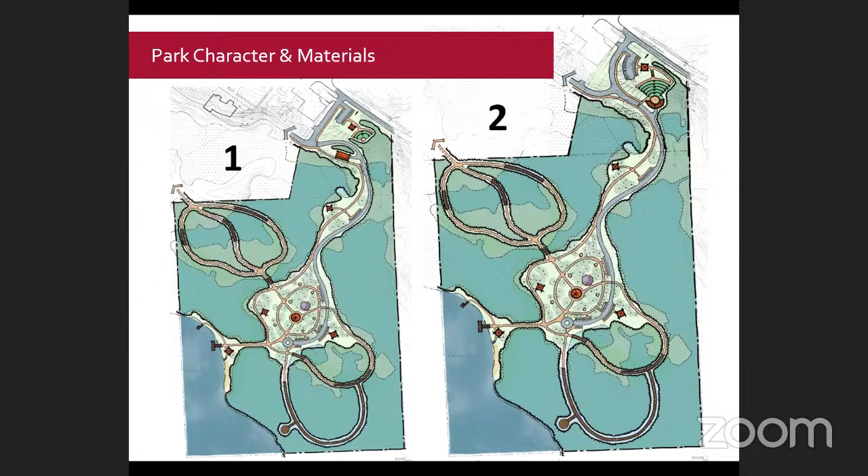This is a slide excerpt from our last presentation at the last meeting. As you might recall, we had a couple different options that were pretty similar, except for the north end of the park, which was related mainly to the amphitheater size and capacity.

Overall, everybody seemed pretty content with the conceptual design as presented. Everybody agreed with keeping the character of furnishings and structures consistent with Bloomer Park, and maintaining a little bit of identity across the township park system.

The majority of the committee members favored a larger capacity amphitheater, but at the same time, I think we all recognize that's going to be a much later phase in the park development. There's a lot still to be discussed and figured out in terms of the amphitheater, so what we're showing at this point is more or less a placeholder.

There was some mixed opinions on the use of porous pavements, or which type of porous pavement. So when we get into the cost estimating discussion later, we've used some cost figures that would accommodate a variety of different options, just so we have some dollars allocated for that.

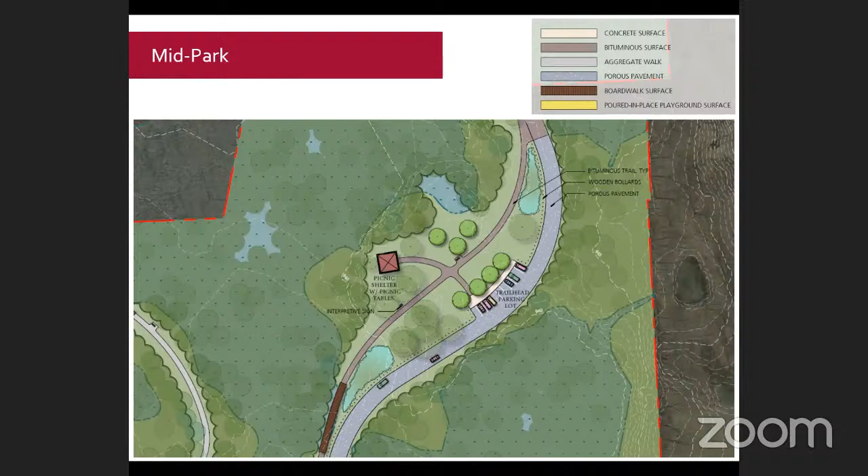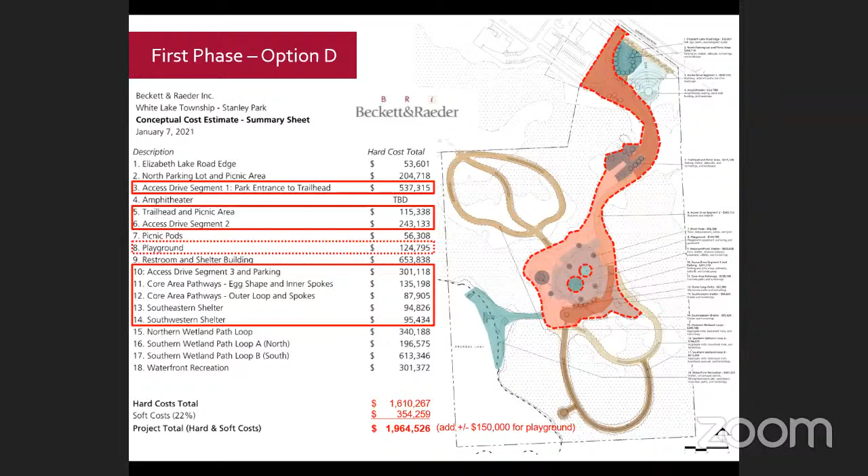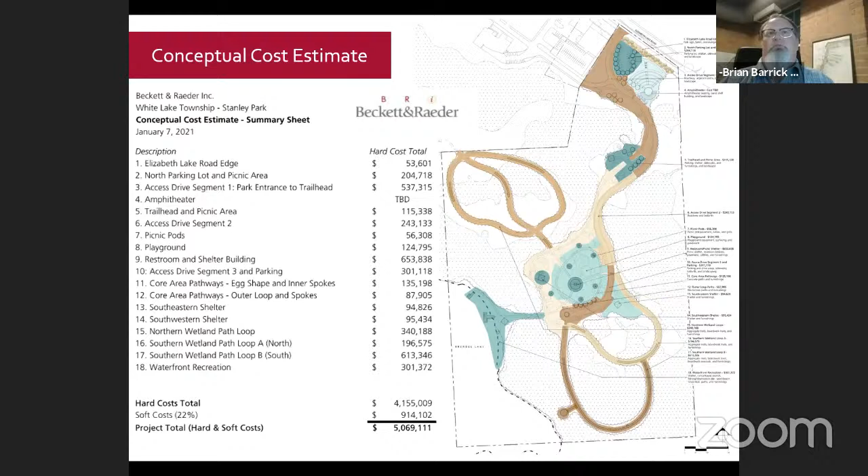So I'll pause here for a moment and flip back to this diagram. I'd just like to gather everybody's thoughts on priorities for our first phase, and if you have any reactions to the menu of options or these four concepts that we've initially roughed together.

And Justin, maybe you want to give a brief introduction to budget thoughts. Sure. So where we're at now - the accounting department is still finalizing the December report, but as of now, the parks fund balance is approximately $215,000.

With the millage collection for this year, that's estimated to be about $356,000. So that would put the parks fund at $570,000.

So we have an annual maintenance cost of, I'll say 50,000 to be safe. And in 2020 it was like 42,000. And that's just grounds maintenance. Then we have some insurance costs and electric, some utilities if we turn on the lights at the pavilions.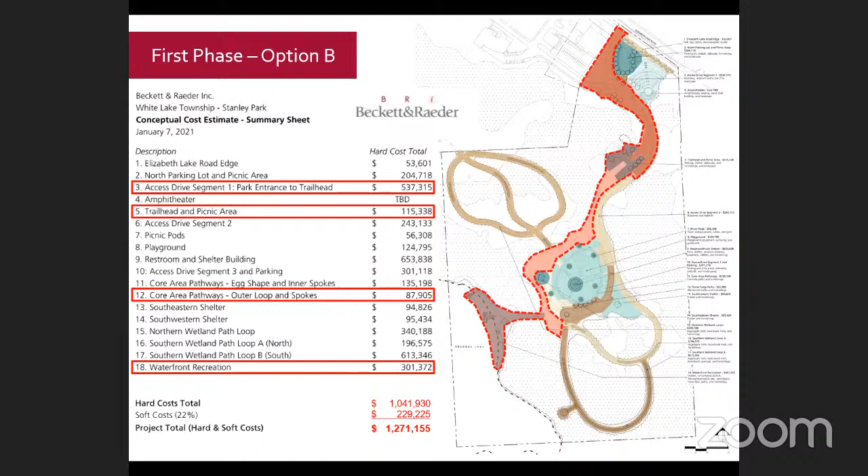I want to give our parents and grandparents peace of mind that their children are safe being on the playground. Secondly, there's water in this park, so we need to be conscientious of that. Even in the wetlands, there's water deep enough that children could potentially fall into. So what I have in mind is a fence similar to our neighboring community of Hess Hathaway Park, a wrought iron fence that shuts with a gate. It's really a popular destination for families because their children are safe and stay in one area. So I'd like to request a fence around the playground area.

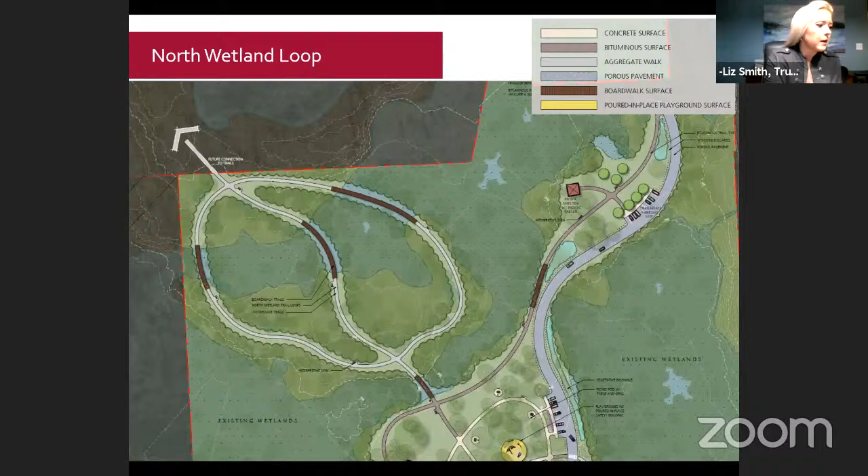Secondly, the parking circle, the cul-de-sac area needs to come much closer, as close as we possibly can, to the waterfront. It's still quite a distance, and there is room. If we go to the slide, Brian, help me out here, but I think there's probably 50 to 100 feet that we can push that closer to the drop-off area, closer to the stretch between that area and the first picnic shelter.

So that needs to come as close as we possibly can. Ideally, I'd like to see some handicap parking spots at that picnic shelter near the water. I know that there is a structural issue crossing the wetlands there, so that might not be possible. But we do need to service properly our handicap residents, physically disabled, and of course, senior citizens. That is quite a distance.

Even if you move it closer, it's quite a distance to drop off and then park back and walk. Potentially you have senior citizens in their 70s or 80s. They have to drop off a spouse, come back, and walk again. So I want to get that as close as we possibly can. I also would like to explore the option of a pull-off or a drop-off if possible to cross those wetlands. I know structurally it might not be possible, but please put your thinking cap on that if it is possible. But at the very bare minimum, that needs to be moved closer.

I know in the beginning slides, you didn't recommend a dog park and pickleball and things like that. Again, a dog park—I shoulder the responsibility of representing all, 30, pushing 33,000 residents of White Lake Township. A dog park is high on the list. So I need to do my job as a trustee and bring that forth again. I did ask for you to plug that in, and unfortunately it's not plugged in. So I do want to see that in this map somewhere. I do believe we might not be able to do a large scale dog park, but I do believe we might be able to fit it in.

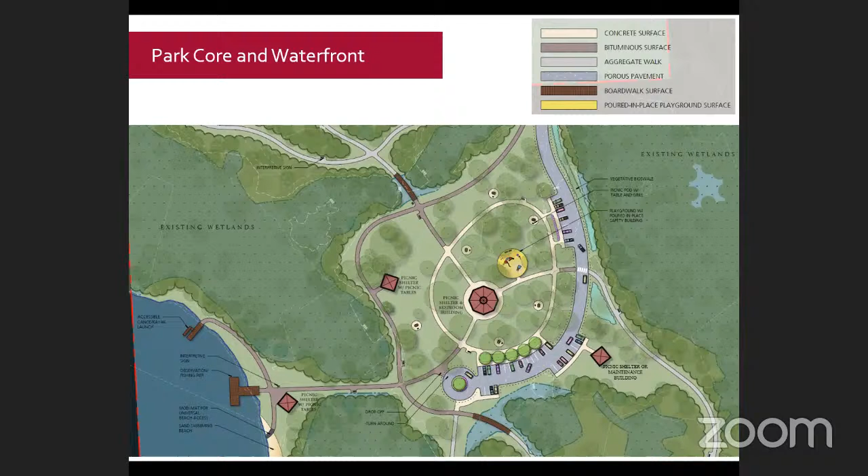Also, as I mentioned, trustees, we shoulder the burden of a different look when we approach township projects. So that road coming in initially does need to move as close as possible to the Civic Center property line for several reasons. One, it gives us some space there to tuck in some other amenities, and two, it's a safety issue for our police and fire. It can become an alternate drive, and it also allows them to keep an extra eye on the entrance and comings and goings of the park.

By moving that road, I think we can fit in a basketball court or a multi-use court. I am not in favor of a passive park here. I'm in favor, like I mentioned, of a unique recreation park. So I see wonderful, beautiful pathways and lots of pavilions, probably too many park shelters and pavilions at this stage. We can always add more later. And I don't see enough to do. I want to represent the growing family in White Lake, all ages and stages, and make this a multi-generational park. So we absolutely need to provide more to do here.

A basketball court, bare minimum, can be used for so many different activities. All ages like to play basketball, chalk, roller skating, kicking a ball, just fun play for any ages. So I don't see enough to actually do at this park. We are really blessed with passive parks in our community. We have Highland Rec State, we have Pontiac Lake, we have Bloomer Park.

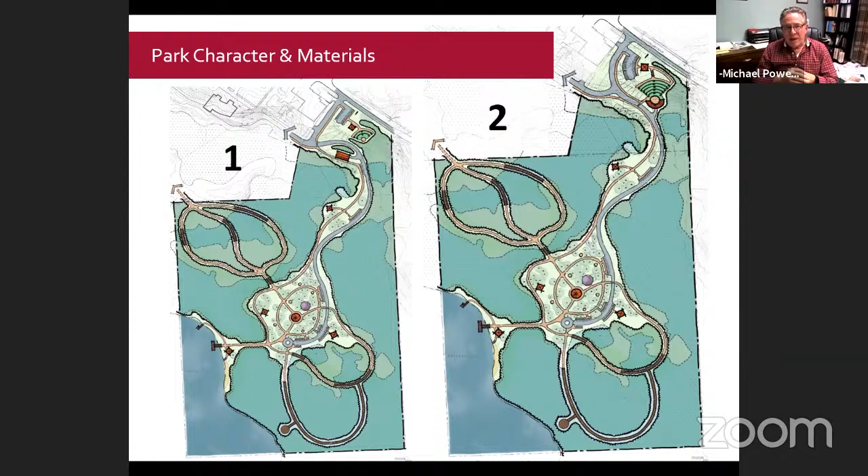I like the idea that Liz presented, and I also presented it to the Lakewood Village Association, that possibly we can have a laser detector to monitor the cars going back and forth from Elizabeth Lake Road, so the police department can hear something, look out, and see the car passing their windows there, and keep track. Is somebody taking a motorized boat down there? Do we have a caravan of motorcyclists going by, or a rack of canoes being dropped off down there? It's something to where there's some accountability, and I'll get into that later as well.

I agree with Liz that a basketball court, even if it's smaller in size, people just love shooting baskets in a pickup game. This is going to be the only activity they're going to have when they live downtown here, and it'd be really nice to have something. I think if that road's pulled over, it doesn't have to be attached to the parking lot. It can have steps going down, tiered down, so that it's an amenity we can offer the downtown area people.

I'm going to suggest, and I'm sorry I missed it, I just picked up Marie saying she really likes the size and the larger type size of the amphitheater. I'm going to suggest that right up front, and even our staff could do it, or volunteer work, because of the slope of the ground there. You could put in a brick paver circle down at the lower level, clear some trees and brush, keep that clean, and have an amphitheater for much smaller events. Certainly nothing you'd advertise on YouTube or Twitter, but you could have a pickup quartet, or singing at Christmas time, right there. Very inexpensive, and then you could grow into the bigger amphitheater - it might be a really neat way to do something really inexpensive.

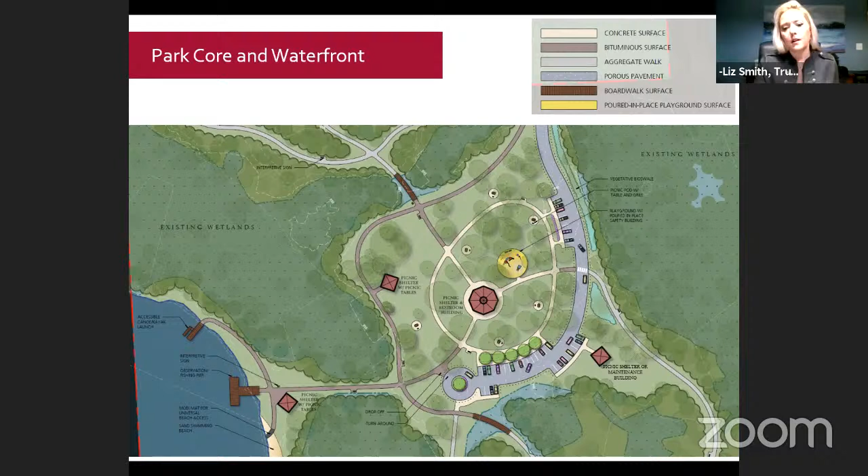And then we could still have a half court basketball here, towards the top entrance. Basketball is just my beginning point. I imagine, I hope we have a natural slope here - we could make a great little sledding spot for the kids in the winter.

I really want to stretch you and push you to think outside the box of what kind of recreation we can provide our community here, because the possibilities are endless and some of them aren't expensive. Basketball - we want to make this, our four-season playground, our most active and used park.

So I want to stretch your thinking, everybody on the board, and I want to thank you for your input and suggestions in getting us to this point. And thank you, Brian, for doing an amazing job incorporating all of our suggestions. But...

There's many things we can do to create some recreation. A sign for an exercise spot isn't a costly recreation, where we can have along the pathways some exercise stops. That's not a huge cost. So just with some creative thinking, we can incorporate more recreation into this park.

I think we're also at an advantage having Mr. Powell as an advisor to the park committee, because he's got so much knowledge and design experience in engineering that he really helps the township by giving us a different view, in addition to our consultants. So I think we're in a good place.

And another thing we need to think about is all age groups. The park needs to be multi-generational. For me, I represent the growing active family in White Lake, and we need to be cognizant of their desires, and multi-generational - where the active grandparent, like Mr. Powell, wants to come and bring his grandchildren.

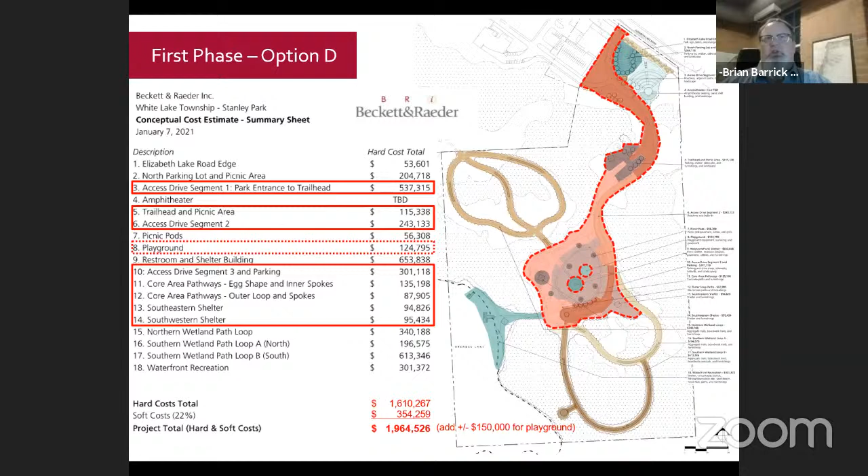It's scaled on the drawing as a 60-foot diameter octagon, so it's quite a large structure. It accommodates a good number of people for a community event or a large family reunion or whatever the case may be. The point is it's a large structure with a lot of capacity, and there's a cost associated with that.

So it could certainly be scaled back into a smaller structure with smaller dollars. We've also included in that number bringing power down into the lower end of the park so that the shelter and the restroom both have power available.

The restroom itself we have figured as an off-the-grid type facility that would utilize harvested rainwater and have very low flow, environmentally sensitive fixtures, where the wastewater would go to a vault system and then would occasionally be pumped according to use. So it's an eco-friendly system, appropriate for this lower end of the park where getting water and septic in these low-lying conditions would be difficult and costly.

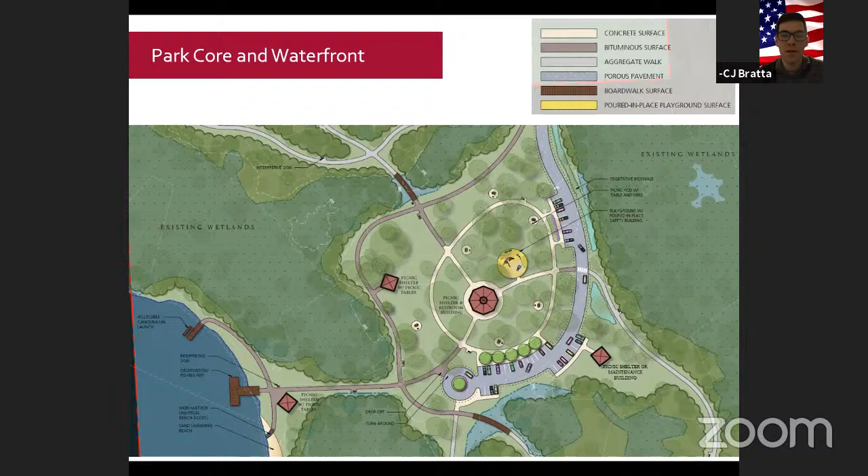I agree with what Liz was saying about what we need to get started. I think we can all agree that number one, the most important thing, is to get a trail from the road or a parking area to the lake. That's the most important thing we all need to agree on, to get this thing going. That's where I see it.

As far as saving cost on the bathroom, my opinion is maybe we can cut down the size of the main bathroom in the center of the park and utilize, as Andrea was saying, the plumbed, already ready building up at the front—instead of one giant bathroom at the end of the park, split it up and have two, one up top and one down at the bottom. In the meantime, until we can afford a large bathroom down there, maybe just utilize porta potties like we use at Holly Park to get us going with our current building, if we can retrofit that and get some bathrooms up there.

The most important thing is getting the trail going down to the lake, because that's what everyone is going to the park for. Everyone needs an accessible way to get down there, and then we can build on after that. I also like what Liz was saying about the fence around the playground—I think that's important to separate everything for everyone's safety, so I think that'd be good too.

That's a lot of information coming in. I just want to be realistic about how much we could put forward for match, providing like a 50% match that would go through a trust fund application and a duplicate land and water application. I'd say there's a 90% chance it would be funded, and if it's funded, it would be through land and water. There's more paperwork involved with a federal grant, but most of those applications are funded.

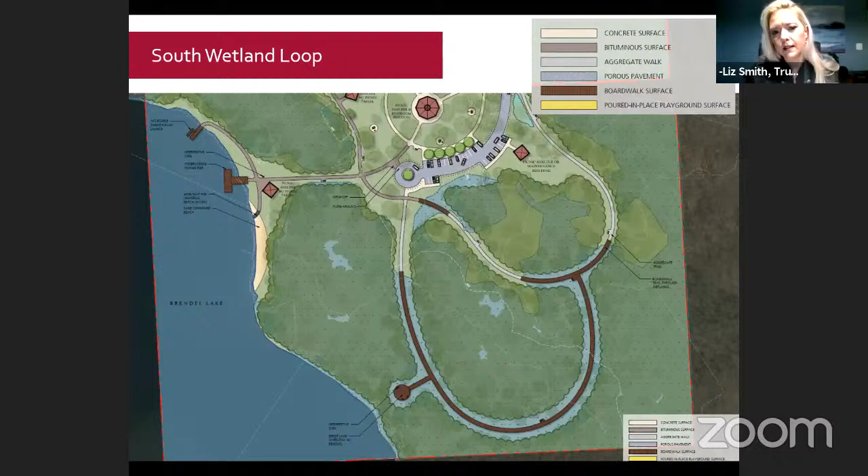Moving the road will be a priority for public safety. So adjusting this portion of the roadway is a priority, as we've been talking about. Keeping the building, there would be two options to do that.

One would be to bring a road along the south side of that building, along the edge of the wetland, which would have impacts and removal of the existing significant trees. The other option would be to swing the roadway further north around the building, which would basically result in a smaller placeholder for a future amphitheater with less capacity.

Okay, and I know I'm putting you on the spot, but just off the cuff here—if we forego that building and build a storage area somewhere else on the property, to not take away from the beauty of the park or future pavilion gazebos or picnic shelters, where would you recommend tucking a new storage building? If we're going to build a new one, personally I'd like it tucked out of the way. I think it'd just be more aesthetically pleasing to not have it in the beauty of the park.

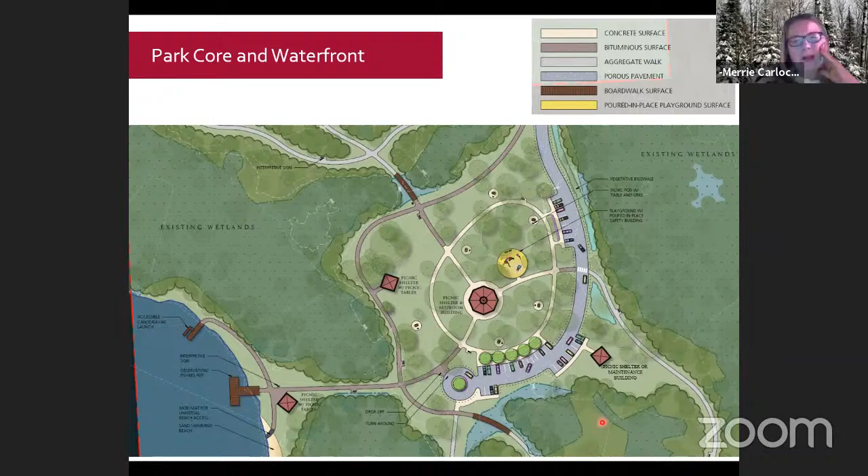We'd have to think a little bit more about that. Our initial thought was tucking it back in this area, which I know is not completely ideal. I think that's prime real estate, so I'd rather see it up by the trailhead—up in this area.

Let me just throw out another thought, though—two thoughts very quickly. Remember that you can't design this in a vacuum. The same equipment used to maintain the park will probably be used to maintain the Civic Center area, so you can't put it so far away from the Civic Center that it makes it inconvenient to do that.

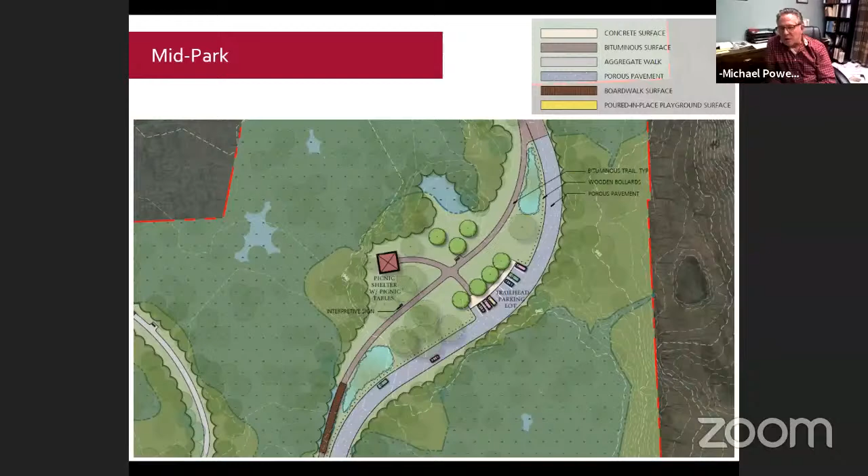Brian, a third alternative, which would be kind of cool—think outside the box a little bit—have the northbound lane go above the building and the southbound lane go around the west side of the building. Split the roadway so you don't take out as many trees with one roadway. Just as a thought.

I think most of us would like those trees to remain. They're beautiful. Yeah, I would feel very bad if the most significant trees were cut down. Totally concur, for a maintenance building.

So just for clarity of direction, is it the board's decision to keep the building or replace it? Can I summarize what I think the consensus has been over the last couple hours and then maybe some direction moving forward? It sounded like the consensus was, or at least the majority said, keep the existing building, try to incorporate some more active recreational amenities, moving the driveway, looking at some potential small fenced off areas for dogs, cutting back on costs, cutting back on the trails and boardwalks so it's not duplicative, exercise points. I think I have a pretty good list here.

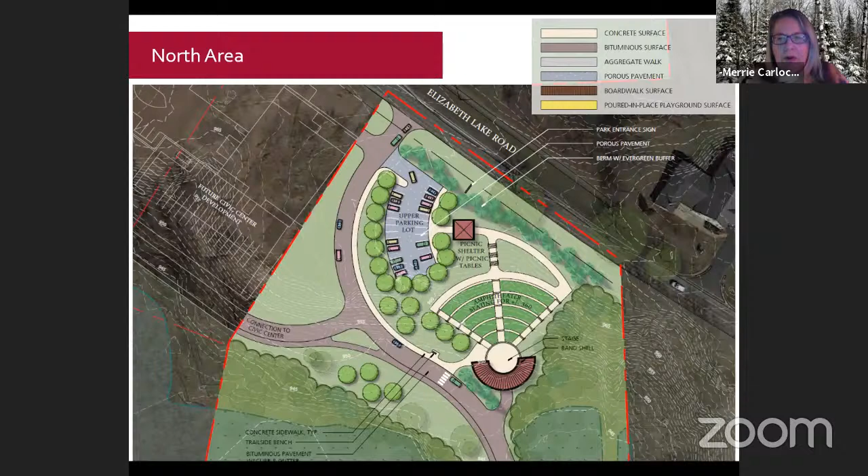Well, I just wanted to get a rough idea for Brian as far as how much he needs to plan for to try and get the ideas we really want done in phase 1 out there. Counting the engineering, you'd be north of $1 million again.

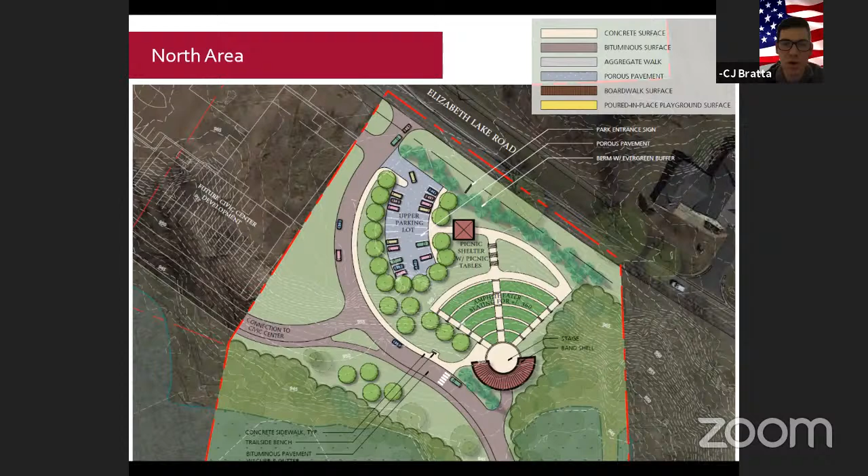Well, either way it's going to go north of $1 million, and the grant, like the trust fund grants this year, is only 300,000. I feel like it's going to go higher in '22, but right now the land and water grants are going to 500,000 because there's supposed to be more money coming to the state from the Park Service. So that's $200,000 more. I'm kind of leaning that way, even though there's more for us to put up front.

There's a lot. Well, yeah, you'd have to put up the $500,000. You'd have to put up $500,000 to get $500,000.

Getting the land and water grant, would we be able to qualify, do you think, based on your knowledge, if we had a trail mostly going to the water? Well, if we get mostly a trail going to the water, would that, I guess, technically qualify because we're getting to the water?

There's no natural resources points in the land and water fund. That's more of a recreation type grant, so it wouldn't matter whether you got exactly to the water or near to the water. But it still would score well. And as I say, most communities can't come up with that half match.

So maybe we need to go, because we're spending the most on phase 1, is what I'm getting at from everybody. We're going to be spending the most money on phase 1. So maybe we should try to get the most money to us in a grant as quick as possible to get this going. And then we can supplement down the road and go for a trust fund grant for smaller other ventures, like the actual kayak launch and the shelter, if we spent some money on other things that make it a usable place that a family can spend time and have a restroom, that kind of thing.

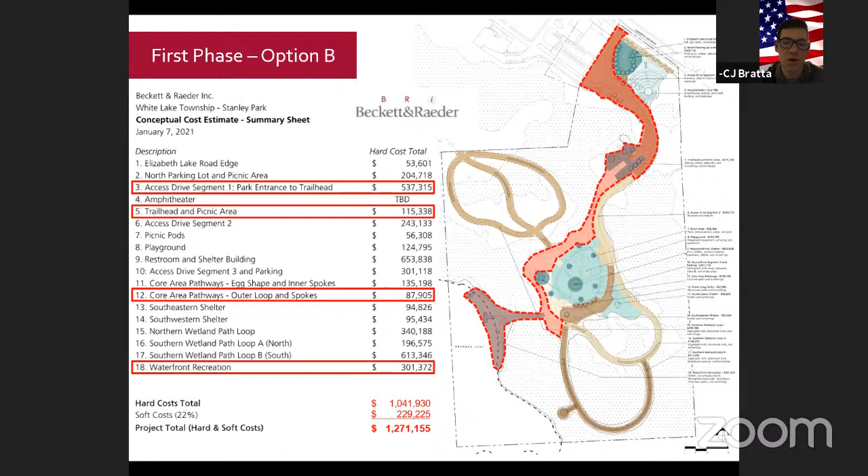Can I ask last question? I want to go back to what Rhonda said, because this has been bugging me. We had the meeting at Holly Park with the citizens, and I'm hearing two very different things, and I'm wondering when the two might collide. Very clearly at that meeting, the public hearing, people wanted this left natural, and I have to say it's kind of news to me that we're expecting this high density use. At what point are you going to let the citizens know that we're intending to make this actually a high density area? In my mind, that's not really what I would conceive of as natural.

I think that some of the plans, you're trying to stuff too much in here, and with all the things that have been suggested, I can't imagine how that's going to be kept natural. So I think you're going to run into some problem down the line, and I wonder at what point you're going to include this bigger plan of this downtown civic center and its density to the people that came to the other public hearing meeting.

If I may, we as a board have been talking about it for a good two years in our township board meetings. The visioning session was a great participation for White Lake history, but as I mentioned before in a board meeting, it was a small sample of our 32,000 residents. We additionally had the survey that had some other results. So as board members, Ms. Voorhees, Mr. Powell, and myself, our board's contacted by residents, and we've been talking about the Civic Center and this main hub for several years, and we do have an obligation to represent our entire township.

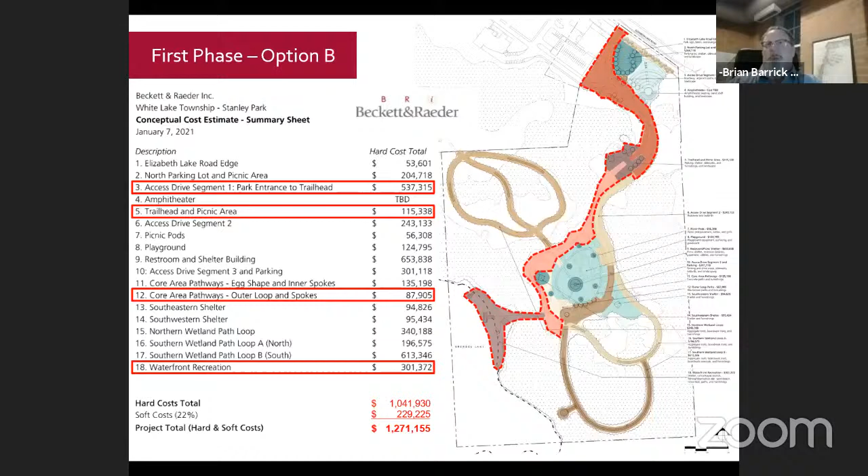We have an extra meeting, and I think that is warranted. Brian, thank you for that comment, because from the flip side of that, to be respectful of Andrea, Mike Powell, and I, and the rest of the board.

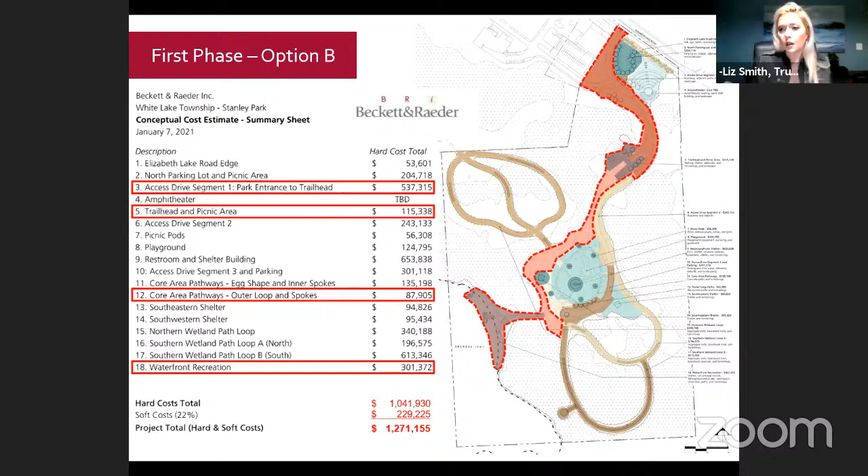We are requested by residents a lot, having a dog park here is one of the top requests. So we're doing our job bringing those residents' voices forward. Maybe it won't be a typical dog park, maybe it's a version of it, or a compromise, an area that's not 5 acres, but something. I appreciate Brian's comment to let us twirl that around a little and see the possibilities.

Thank you. And of course, the park will be open to dogs on leashes anyway, in addition.

All right, I think we need to move on. I don't think we're gonna make any motions tonight. We'll take a look, and thank you, Brian and Caitlin, for our short window. This happens a lot in these kinds of projects, so appreciate your patience.

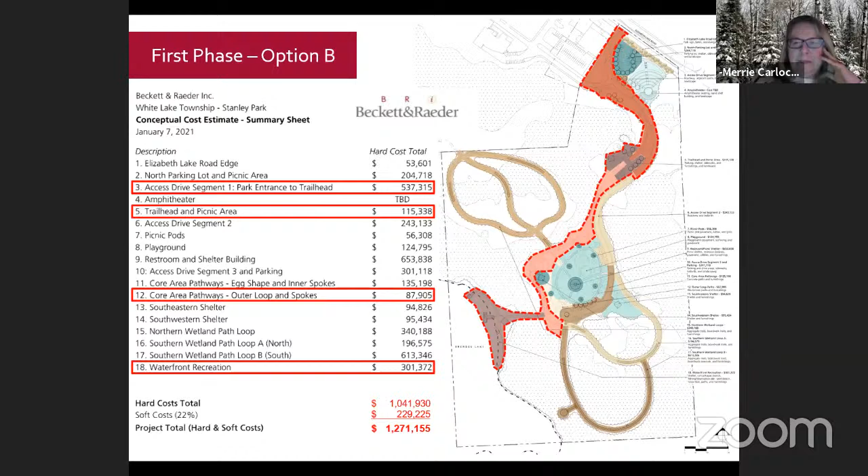So we talked about the park funds and budget discussion as part of that. Justin, do you think there's more to say? We talked about how much we might spend, so I think we've covered it.

Let's talk a little more about the Wilson Foundation application for design, just briefly. I know the Township Triangle Trail was mentioned tonight. Last week we submitted a grant application to the Wilson Community Foundation for a $50,000 grant to aid in the design and engineering of the Triangle Trail, the one mile that's remaining. That is estimated to cost $100,000 just for the design and engineering work. If we're fortunate enough to receive the $50,000, the township will have 50% of the design work covered, and then we'll have it ready to be built.

So we could go out and bid it in phases if we have to. As came up in discussion tonight, it sounds like everyone agreed that constructing the Triangle Trail and pathways is still important in addition to Stanley Park. So we're going to have to try to make it work. We should hear back by late April if we're going to receive the funding, and if we do, we'd receive it in May of this year.